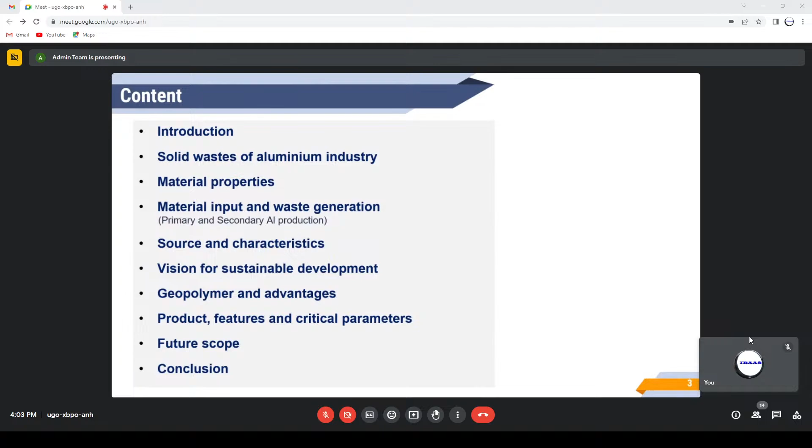Generation of rejects or byproducts is an inevitable part of industrial progress. Therefore, waste management is a matter of utmost importance in view of environmental concern and the large accumulation of unused rejects. Mining, refining, and smelting are the major steps involved in the metallurgy of aluminium. Different types of byproducts are generated at every stage of metal production, leading to a large accumulation of solid rejects having varying chemical and physical properties.

The aluminium industry represents both primary and secondary aluminium production, and the overall upstream activities of metal production generate a variety of solid rejects broadly classified into processed and unprocessed materials. In general, the rejects of aluminium industry origin are aluminosiliceous resources such as high silica and low alumina fractions. They are left unused and kept as future resources, or partially used in landfills.

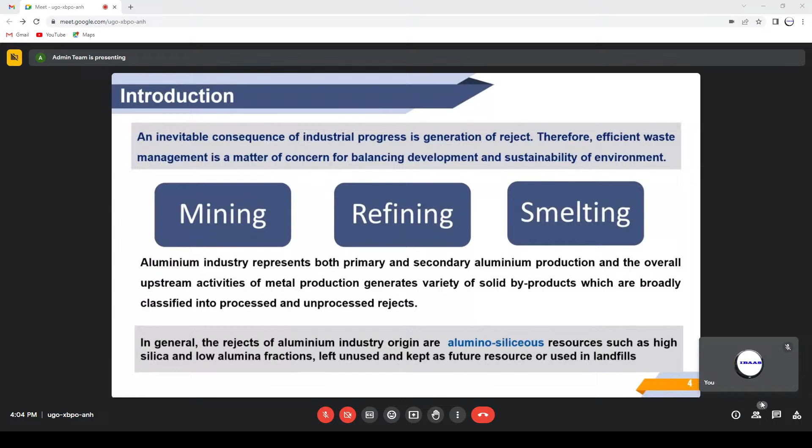Over the years, the outlook on process leftovers or byproducts has changed, and the leftover materials are now considered the best resource for secondary applications.

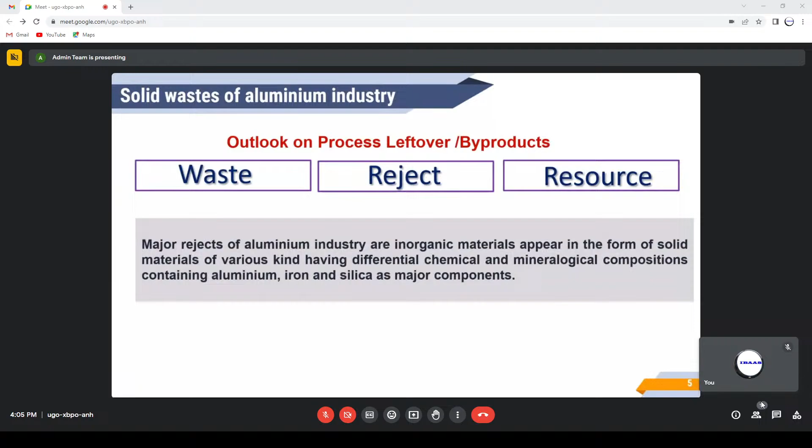Solid rejects of the aluminium industry are precisely inorganic materials, and most of them are mineral-rich secondary resources. These materials are readily usable resources for industries such as building and construction, road construction, paint, pigment, and paper industries, ceramics and castables, and are also useful for extracting valuable mineral values such as rare earth and precious metals.

Both primary and secondary production of aluminium are left with a variety of solid rejects which are useful materials for productive applications. Many of the rejects from the aluminium industry appear in ready-usable form. The advantage of rejects from the aluminium industry is that they possess innate material synergy among themselves, as well as with many reject materials from other sources such as steel, power, oil, biomass, etc.

That means, based on the chemical and mineralogical composition, these materials can be mixed together to make a composite of better quality for specific applications.

The details are discussed here as alternative resources for the production of different types of building materials based on a non-fired and chemical process route. This presentation precisely highlights the potential of the processed and unprocessed solid rejects of aluminium industry origin as resources for making geopolymer products, along with technical hints of value addition for commercial exploitation.

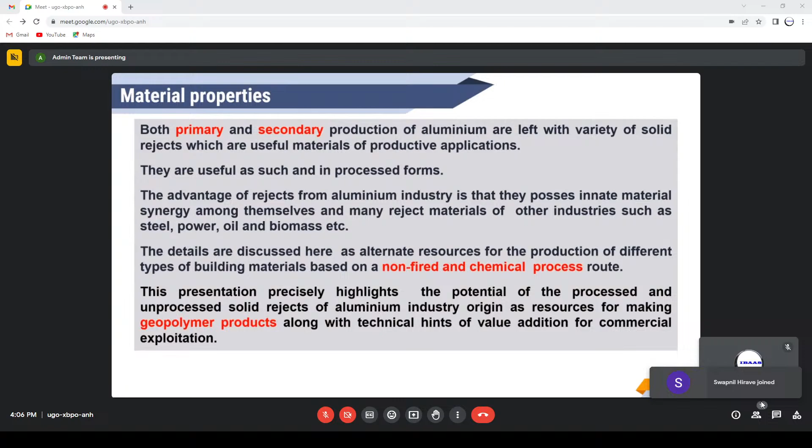The material input and quantum of byproduct generation is very typical for primary aluminium production. The raw material input for production of 1 kg of metal starts with approximately 4 kgs of bauxite, and the Bayer process yields approximately 2 kgs of alumina. Further, the energy-intensive electrolysis process additionally consumes approximately half a kg of materials in the form of carbon and cryolite.

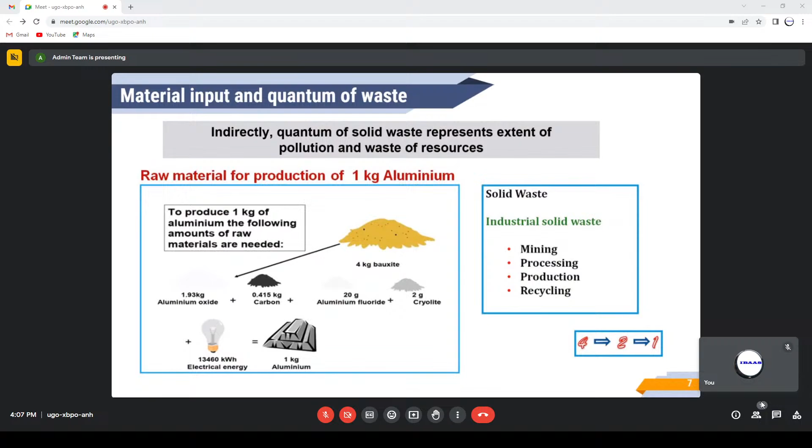Since the quantum of waste generated represents the extent of pollution and material loss, there is a need for reliable and applied process options for rejects generated during mining, processing, production, as well as recycling stages.

Secondary aluminum production or aluminum recycling also generates different types of waste materials. The major solid rejects generated during aluminum recycling are filter dust, salt slag, and furnace lining. The chemical composition of these materials is good enough to make suitable combination material with other industrial rejects from primary aluminum production.

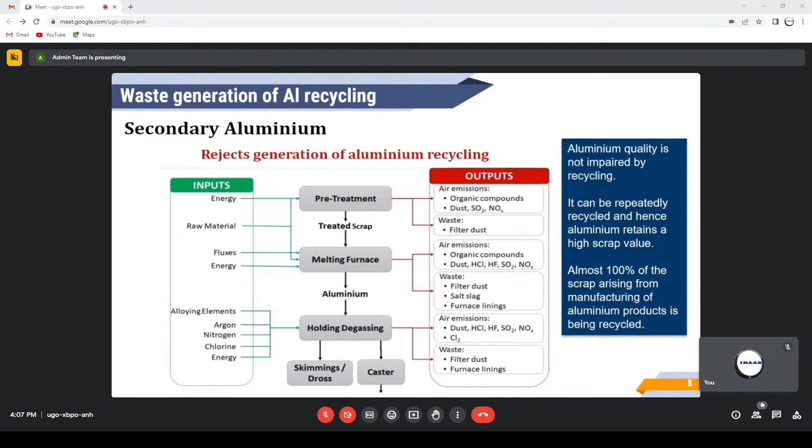Let us look at the processed and unprocessed rejects of primary aluminum production. Low-grade bauxite, overburden laterite, kaolinitic khondalite, partially lateritized khondalite, and lithomargic clay known as saprolite are some of the major unprocessed resources largely associated and available at the bauxite mining site.

Processed rejects of aluminum production mainly represent red mud, aluminum dross, and spent pot lining material known as SPL. These reject materials have distinct characteristic features, chemical composition, and mineralogical composition that differentiate them from the parent bauxite or the starting material used in the process.

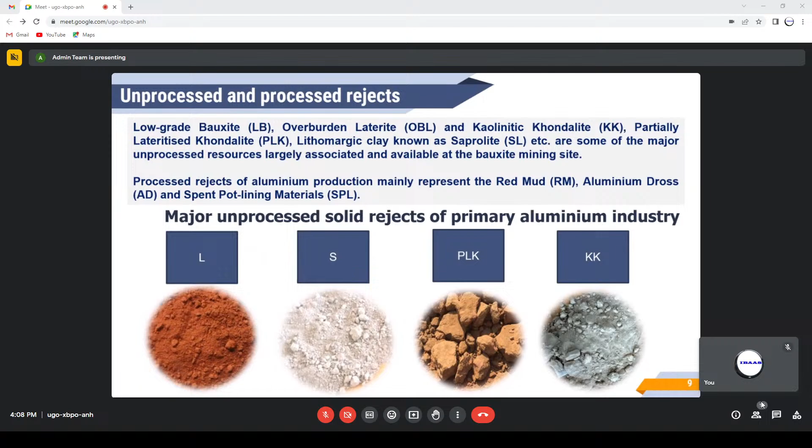Kaolinitic khondalite, KK, has properties similar to PLK and exists beneath the bauxite layer. KK possesses more silica, alumina, and less iron in its chemical composition. In India, the bauxite mines at the Eastern Ghat region located at Odisha and Andhra have PLK and KK horizons.

Saprolite is composed of clay minerals that result from in situ weathering of bedrock by acidic groundwater. A complete laterite bauxite profile usually comprises four horizons and rests on the parent rock which provides the source material for bauxitization. In most of the bauxite deposits of Western Ghat, Maharashtra, Chhattisgarh, Jharkhand, and Gujarat, this rests on the saprolite zone.

Lateritic soils are formed in the tropics through weathering processes that favor the formation of iron, aluminum, manganese, and titanium oxides. This consists of minerals such as kaolinite, quartz, hematite, aluminogoethite, gibbsite, boehmite, diaspore, anatase, rutile, etc. The laterite contains high iron oxide, low alumina, and high silica.

The laterite derived at the bauxite mine is generally known as overburden laterite, which is removed from the top layer during mining activities.

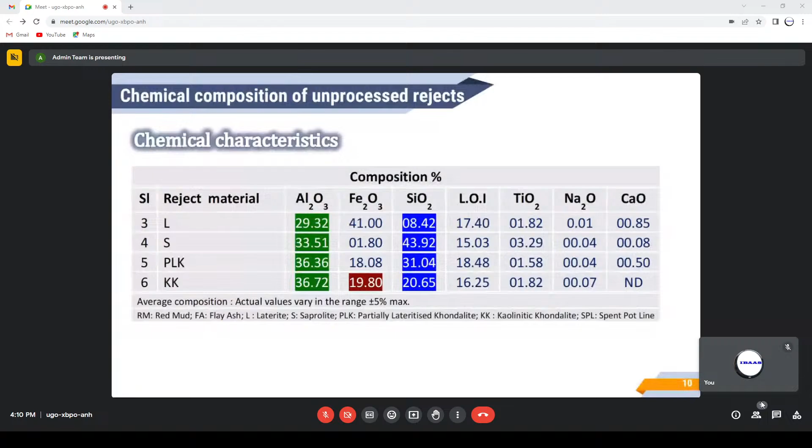Aluminum dross, bauxite residue known as red mud, spent pot lining or SPL, filter dust, salt slag, and furnace lining are the major processed waste or reject materials generated during aluminum production. Red mud is the largest solid waste and least utilized one of all the solid rejects generated.

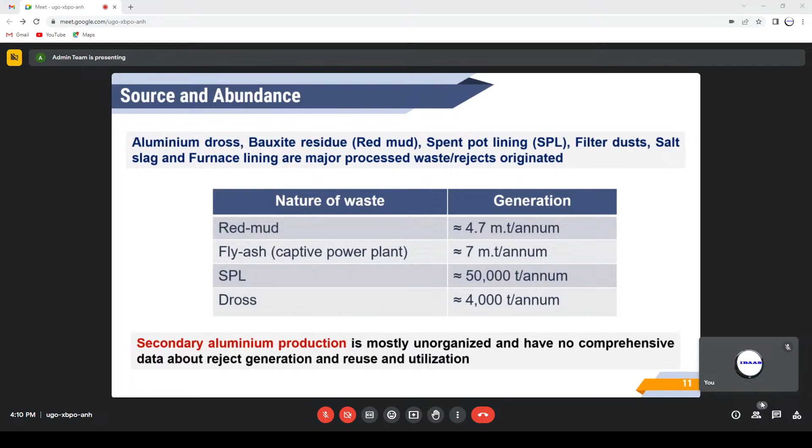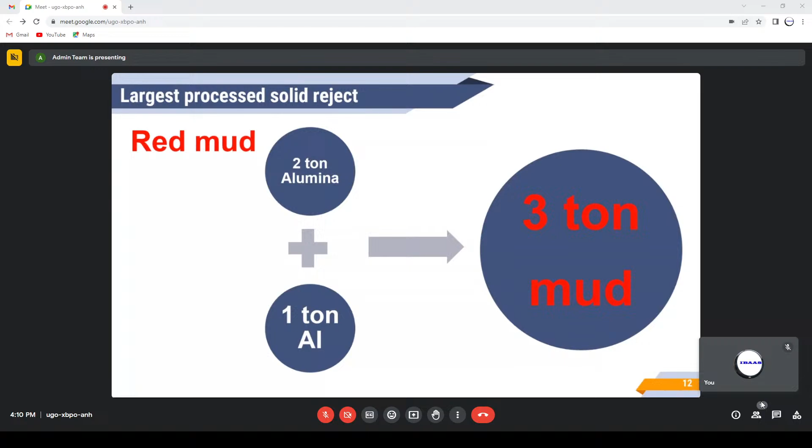Secondary aluminum production is mostly unorganized and has no comprehensive data about reject generation, reuse, and utilization. Red mud is the largest and least utilized solid reject of the aluminum industry. One ton of aluminum metal production approximately generates three tons of red mud.

The characteristic feature of red mud is a high percentage of Fe2O3. Almost 50% of the total mass constitutes Fe2O3, along with a good percentage of alumina and silica, along with sodium and calcium.

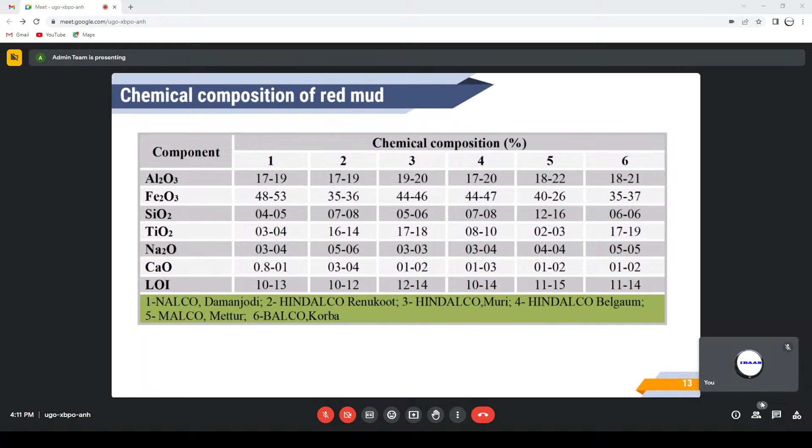Other processed rejects of the aluminum industry containing aluminosilicates are SPL, anode butts, and aluminum dross.

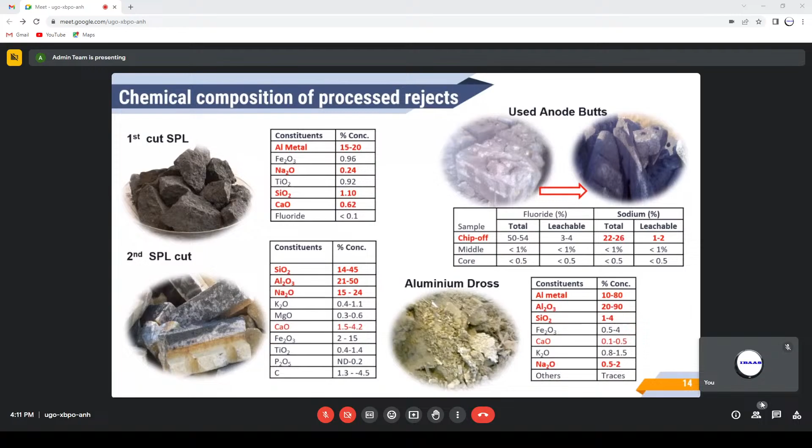Of late, industrial rejects are considered secondary resources for manifold applications involving recovery of mineral values, precursor for onward processing, as well as raw materials for product development. Resource augmentation based on workable utilization of reject presents a successful model, which highlights the use of minimum processing steps, low emission, energy efficiency, speed, low cost, and marketing options, etc.

The vast increase in carbon dioxide and waste generation in recent decades has been a major obstacle to sustainable development and sustainability. In the construction industry, the production of ordinary Portland cement is a major greenhouse gas emitter, with almost 8% of total carbon dioxide production in the world.

To address this, alkali-activated materials and geopolymers have more recently been introduced as a green and sustainable alternative to ordinary Portland cement, with significantly lowered environmental footprints. They are used to replace Portland cement products, generally leading to vast energy savings and reduced use of virgin materials, resulting in sustainable concrete production.

By doing so, it reuses the solid waste generated in industrial and manufacturing sectors, which is aligned with circular economy. In turn, it reduces the need for ordinary Portland cement and promotes sustainable development.

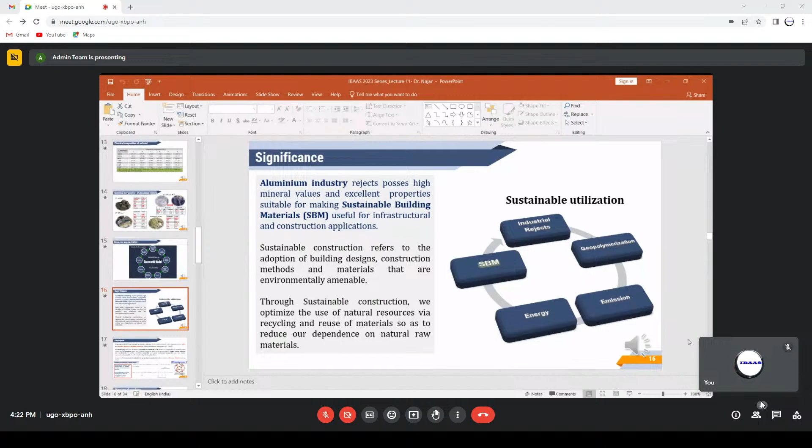Industry rejects possess high mineral value.

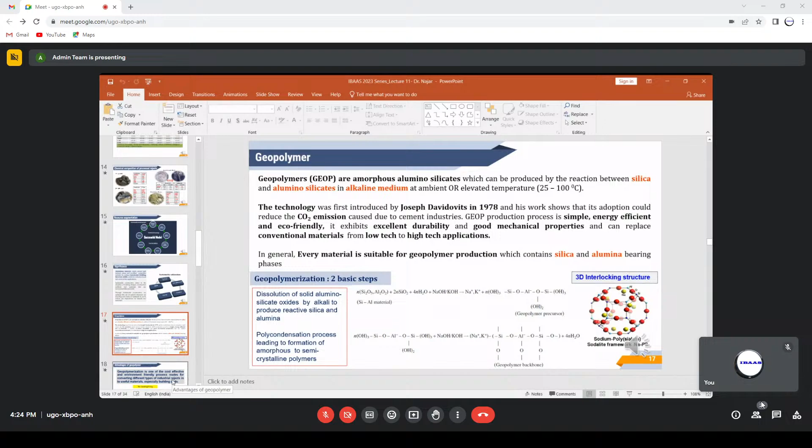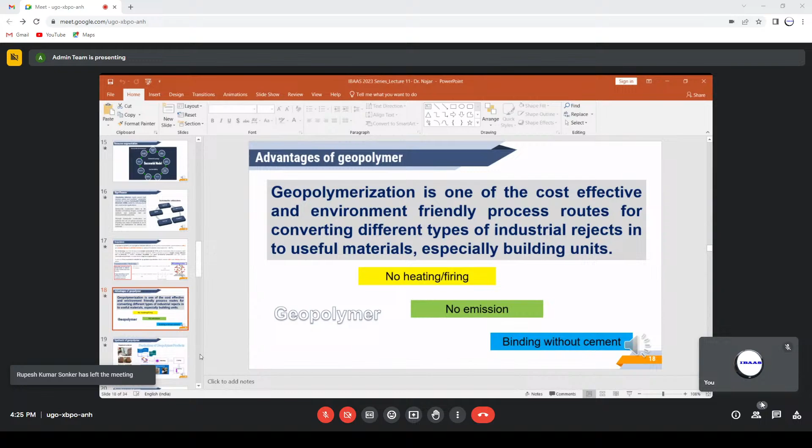Alkali activated materials are not polymers, so they cannot be called geopolymers. And many scientists and civil engineers mistakenly consider alkali activated materials as geopolymers.

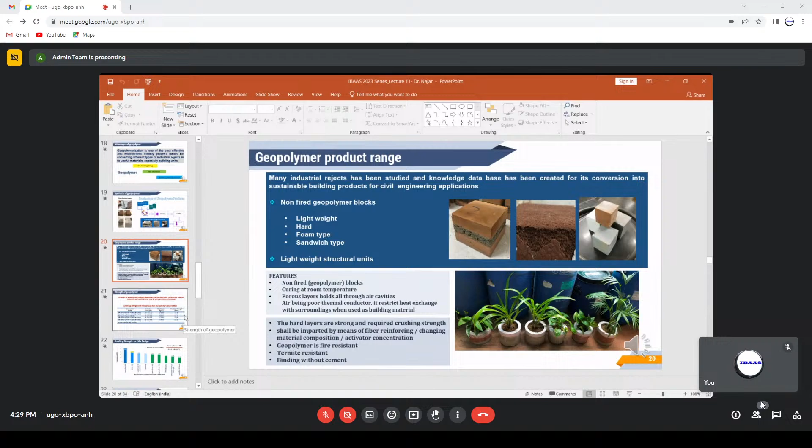When we make geopolymer for construction and building applications, the following parameters are decisive and related to material properties. Crushing or compressive strength of geopolymer is directly proportional to alkali activator concentration and curing temperature. Water absorption depends on the curing temperature and dry mix composition, and the physical synergy of materials has a direct impact on water absorption.

With increasing porosity and decreasing curing temperature, efflorescence of geopolymer increases. Density of geopolymer does not depend on the concentration of activator; it mostly depends on the nature of raw material composition.

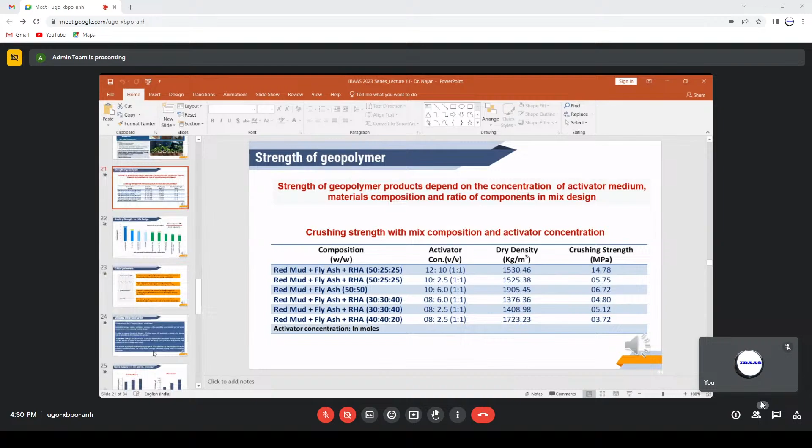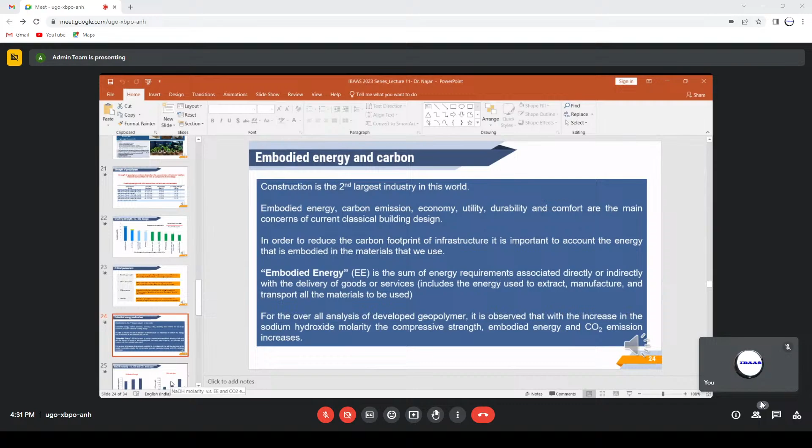A comparative study on the variation of embodied energy and carbon dioxide emission with respect to the increasing concentration of sodium hydroxide in alkali activated medium is shown here. The dry mix design used was a mixture of fly ash and laterite in 1:1 weight-weight ratio.

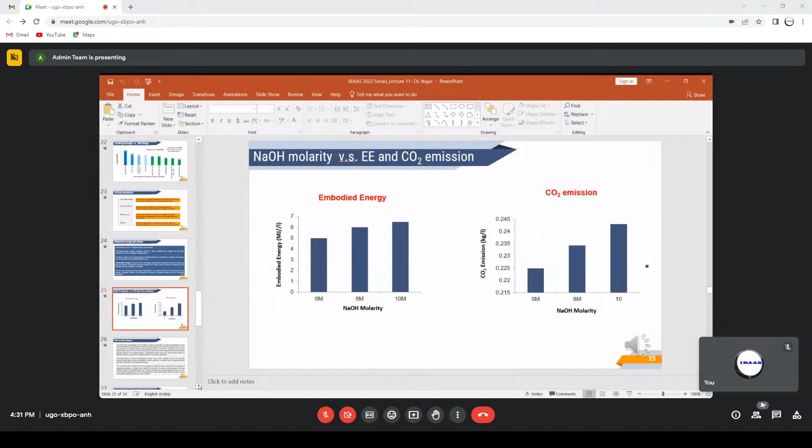It was observed that the XRD data or mineralogy of material is useful for choosing the right combination of raw materials based on the presence of active mineral phase within the component oxide. For example, the prominence of crystalline quartz and amorphous silica in total silica, as well as more active gibbsite, less active boehmite, and least active diaspore in minerals usually present in low-grade bauxite, overburden laterite, and other clay mineral rejects at different ratios in total alumina for alkali activation at ambient condition.

This information of active mineralogical phases within the specific mineral oxide is also useful for measured use of alkali activator, that is a combination of sodium silicate and sodium hydroxide for geopolymerization. The reserved use of alkali activator in geopolymer facilitates better economics and quality of geopolymer product.

Proper use of alkali for activation of active mineral phases in the raw material marks low efflorescence and material strength by encapsulating the less or non-active mineral phases or mineral components within the geopolymer three-dimensional structures based on the tetrahedron sharing of active aluminum and silicon atoms. Further, the limited or controlled use of sodium hydroxide and alkali activator keeps a cap on the emission of carbon dioxide as well as embodied energy in the overall geopolymer matrix.

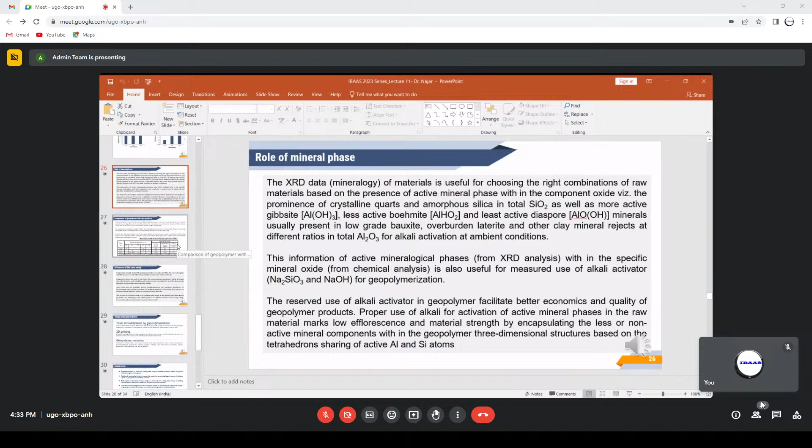A comparative study is presented to affirm the superior quality of geopolymer-based building material. Physical properties of overburden laterite-based geopolymer brick were compared with the commercially available burnt clay and fly ash bricks. The comparison showed that the density of OBL brick is 12.5% and 22.2% lower compared to burnt clay and fly ash bricks respectively.

The achieved compressive strength of OBL at ambient temperature is far more than that of burnt clay and fly ash bricks, which will ultimately help in saving energy required in case of heat curing. Overall, the developed geopolymer brick using laterite as primary raw material resulted in performance improvement. Wherever higher strength of brick is a criteria, these geopolymer bricks can be conveniently used for construction purpose.

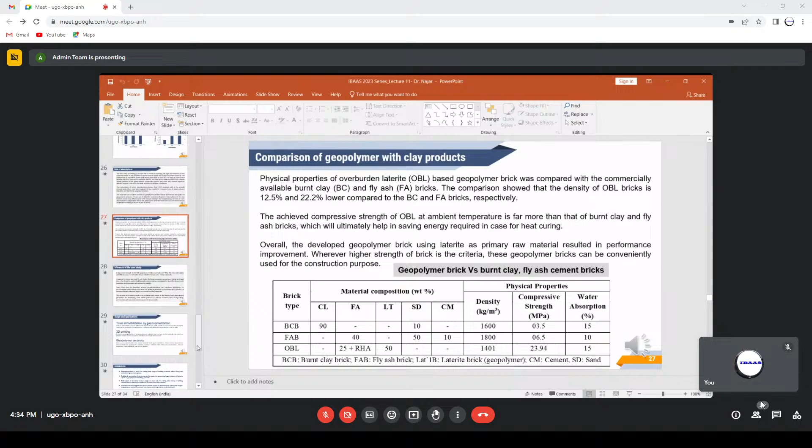The following are the inferences of the case study. Compressive strength of OBL geopolymer brick is as high as 23 MPa. The water absorption and efflorescence are well within the permissible limit given by Indian standards. Compared to burnt clay and fly ash brick, the basic properties of geopolymer blocks developed show that it can be used in building and construction as a substitute for burnt clay bricks or clay products, depending on the purpose and engineering models.

Apart from that, the described process, geopolymerization, can contribute significantly to the environmental preservation, since there is a practical possibility of converting large quantity of aluminosilicious industrial rejects as alternate building materials. This mineral-rich resource needs to be exploited with respect to the chemical and mineralogical parameters for developing value-added products at ambient conditions, thus saving energy, environment, and natural mineral resource for future needs.

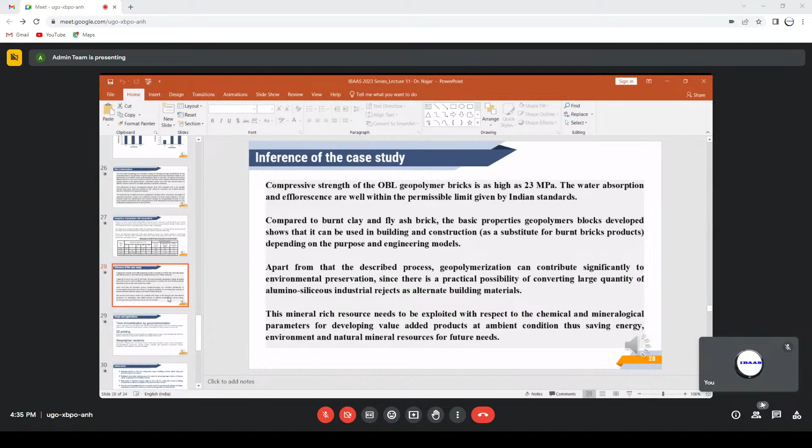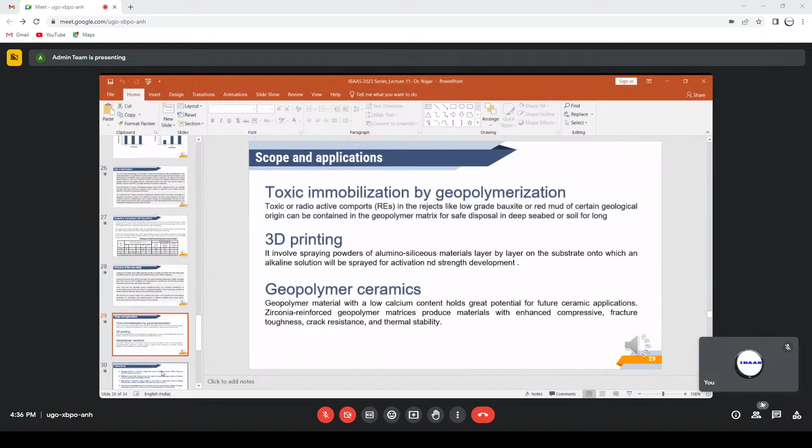Coming to the conclusion, geopolymerization is useful for making wide range of building materials without firing and emission of greenhouse gases. Building and construction industry possesses the space for consuming largest volume of industrial rejects and geopolymerized building materials. Solid rejects of aluminum industry origin are best suited for making wide variety of building materials with or without the addition of materials from other sources.

Chemical and mineralogical data of raw materials need to be considered for making mix designs of geopolymer products for reduced use of commercial ingredients as alkali activator. Since the embodied energy and overall carbon dioxide emission is directly proportional to the alkali activator composition, calculated use of sodium hydroxide is advised for making activator composition. Scope and use of geopolymer as a reliable medium for containing heavy metal pollutants, radioactive elements, and other toxic components for safe disposal need to be investigated.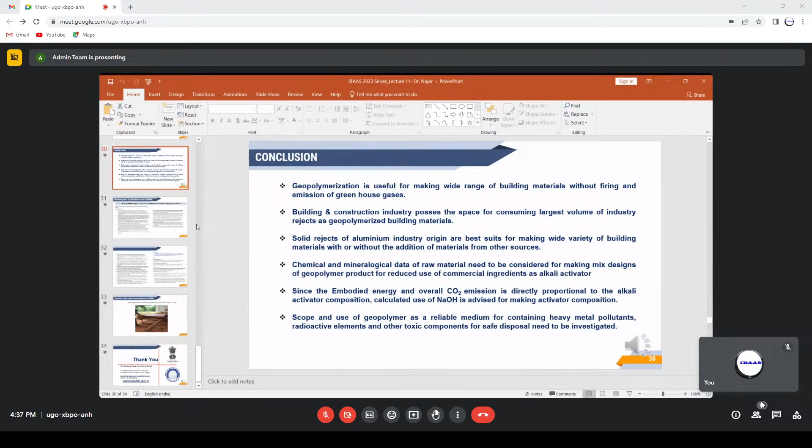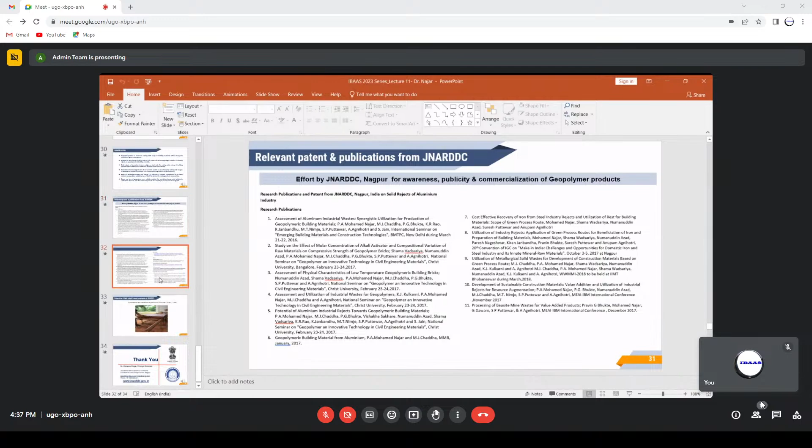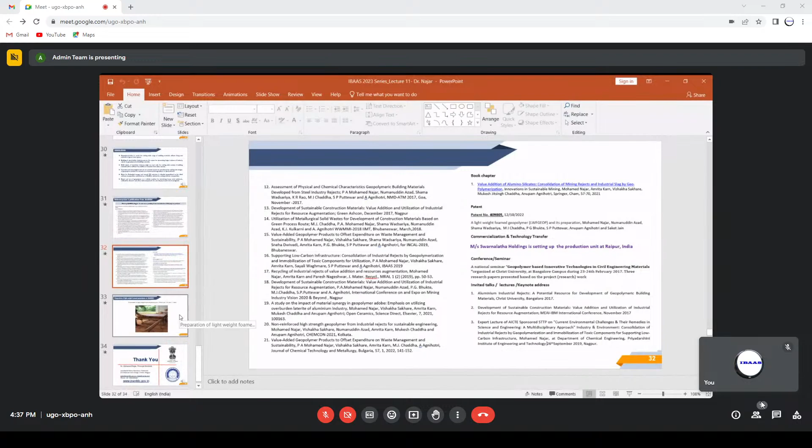Here we are presenting some of the latest publications from JNARDDC related to geopolymer and aluminum industry waste utilization. This is one of the small videos that is showing how lightweight foamed geopolymer can be prepared from red mud and fly ash mix.